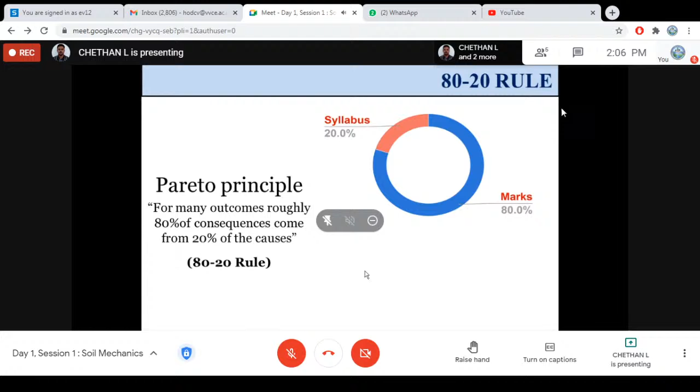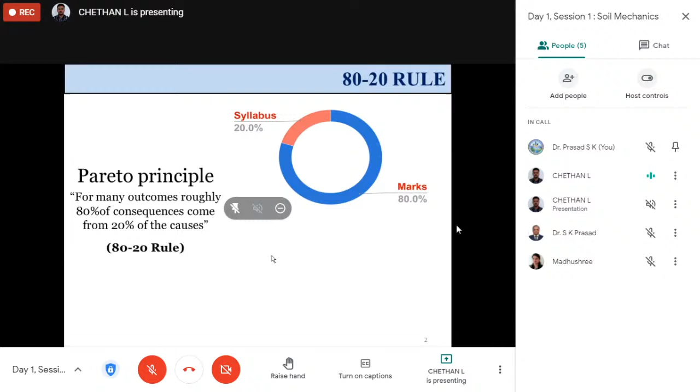So let me start session one. Today's session is soil mechanics, and this is the first session. The basic concept I personally believe in for any winning strategy is the Pareto principle, which says that for many outcomes, roughly 80% of the consequences come from 20% of the causes. Here, 80% of the consequences basically means 80% of the marks you can obtain from any examination can come from 20% of the causes, which is basically 20% of the syllabus.

Here I am relating the consequences with the marks, as well as the causes with the syllabus. So as I mentioned about the syllabus, that 20% of the syllabus will give around 80% of the marks, which is basically the Pareto principle. The same way, if you apply it from another perspective, to cover just 20% of the marks, we have to study about 80% of the syllabus.

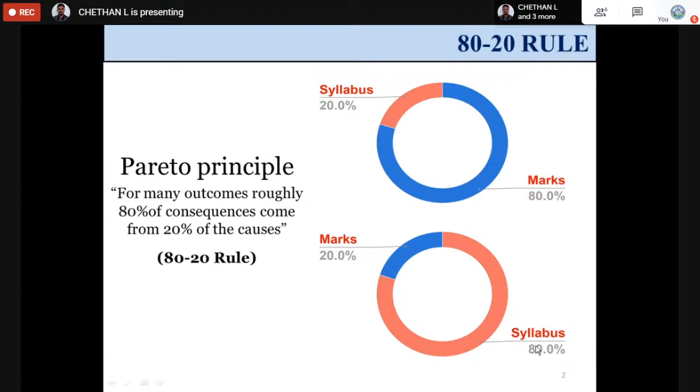Someone can ask me, how can you say this without any proof or data? Here I'm going to show you some data which I have referred from the Made Easy textbook, already available on the internet as a soft copy. You can go through it. It's a wonderful textbook provided by Made Easy and ACE coaching centers.

Here is the data to prove the Pareto principle I told you about. I've taken data from 1991, when the exam started, until 2018, taking two sets of papers for 2018 as well. I took the total marks obtained each year from geotechnical engineering, put them all together, and took an average. So totally I've taken almost 28 years of data, which shows the average marks obtainable from geotechnical engineering every year is around 15.45 marks. That's what I want to show.

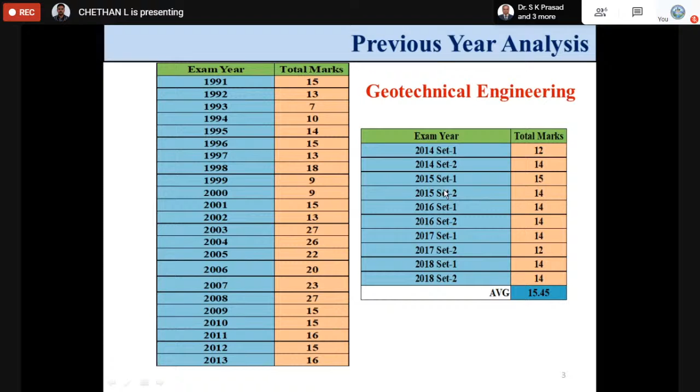Moving on, after doing the previous year analysis of major marks distributed each year, here I'm talking about the total number of questions asked. In the past 27 years, geotechnical engineering always stands first, with 329 questions asked. The next one that tops is environmental engineering, with around 235 questions.

Sir, why are you giving all this analysis? Because I will get back to it. So again, talking about the past 27 years, in 2012 the GATE Board Academy made a small announcement that the 100 marks examination would be conducted including 15 marks of aptitude. So where will the aptitude part come in? That I'll discuss later.

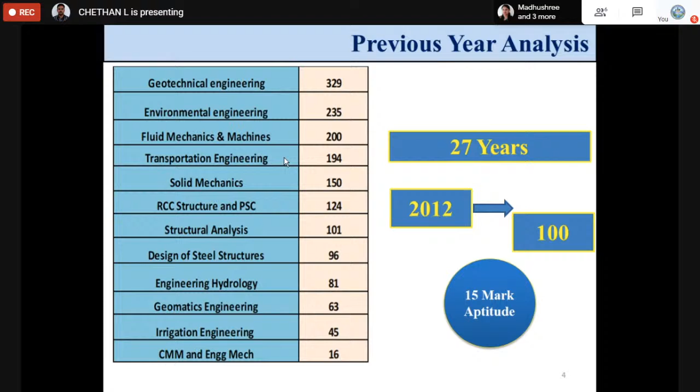I've made a small analysis showing the entire marks distribution already shown for the previous years, as well as for particular subjects in the civil engineering department. But here I've taken the entire data including the aptitude test questions. So the marks distribution for the average analysis goes like this: aptitude is 15 marks, geotechnical engineering is 14 marks, engineering maths is 12.5, environmental engineering is 10 marks, fluid mechanics 9.5, transportation 8.5, solid mechanics 7.5.

Why am I talking about all these things? Because if you look here, if you study only 4 subjects including aptitude along with maths - that's geotechnical, environmental, fluid mechanics, and transportation - you can get almost 69.5 average marks by studying only 6 subjects.

So say, no sir, I want to study more, 70 marks is not enough. If you want to go for more marks, you can study by concentrating on another 4 subjects. Here, what I've done is separated everything subject-wise and put the average marks.

So here again the Pareto principle comes in. For example, if you want to get 70% of the marks, it is enough for you to study only about 30% of the syllabus. That is exactly what I mean. That is why I included the Pareto principle in the beginning, which says 80% of the marks can be obtained from 20% of the causes.

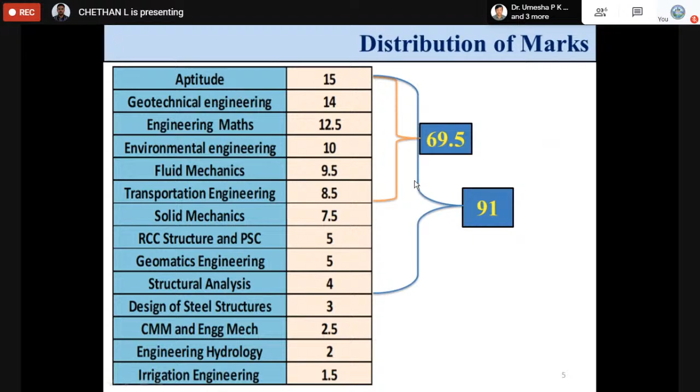That is, here it is a syllabus, right? So further, let me move on. So now I'm going to start the particular soil mechanics analogy here. So welcome you all for the geotechnical engineering. As you all know that, right?

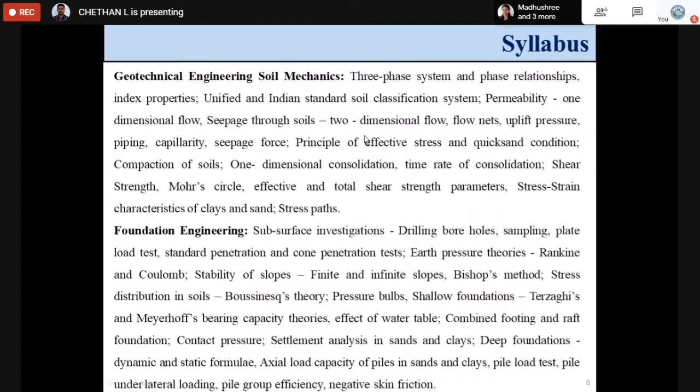So the GATE Geotechnical Engineering syllabus is basically composed of 2 parts. One is called the soil mechanics and another one is called the foundation engineering. In soil mechanics, basically it talks about all the basic elements or basic concepts of geotechnical engineering. But when it comes to foundation engineering, you will be going to apply every concept, every basic we have studied in the soil mechanics. So here is the brief description about the syllabus which appeared in the GATE.

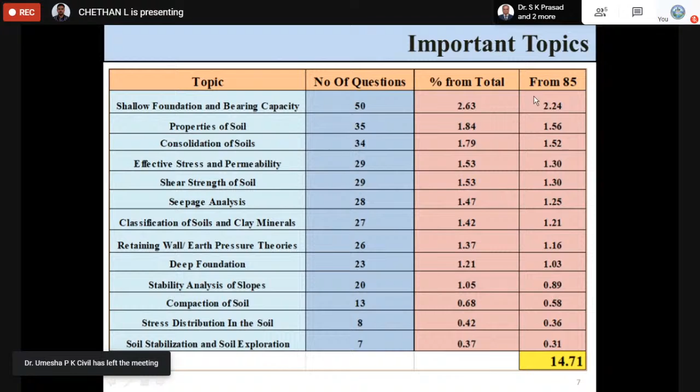The same way I have identified each topic and given the marks list here. As I mentioned earlier, the average marks given to geotechnical engineering is always around 14 to 15% of the marks, that is 14 to 15 marks. Here we come up with 14.71 marks as the distribution from the last 27 years. So this is where the strategy comes.

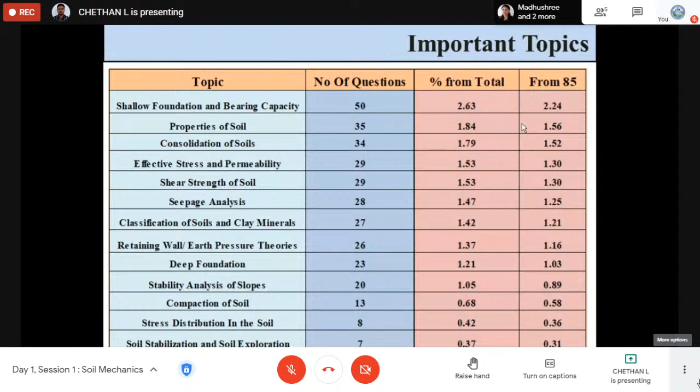So next, as I told you, geotechnical engineering in GATE has been divided into 2 individual topics. One is soil mechanics and another one is foundation engineering, right? So the 12 topics from the previous slide, I again classified into which one is the soil mechanics part, that is the basic part, and which one is the advanced part, that is the foundation part. For that, I have divided these topics into 6 columns: property of soil, classification of soil, clay minerals. These 3 are the theory part, very basic, right? Then we have compaction of soil, effective stress, permeability, shear strength of the soil.

Same way, the foundation engineering subjects: soil exploration, stress distribution, stability analysis, foundation, and retaining wall earth pressure, everything will come under the foundation engineering part. So to cover the entire geotechnical engineering, we have divided the topics into 2 categories: the soil mechanics part and the foundation engineering part. The soil mechanics has been allocated to me, and I will be taking 2 sessions. Today I plan to cover these 3 topics.

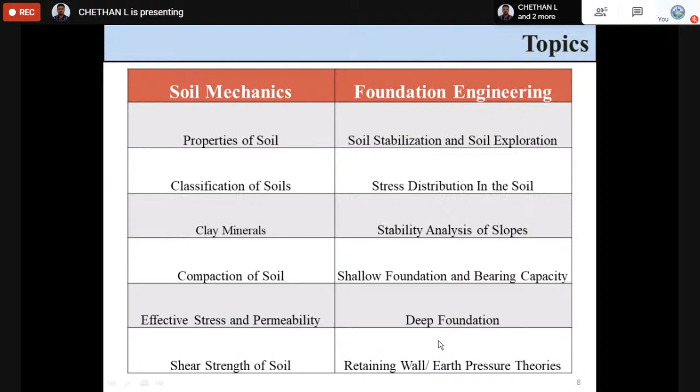The initial first 3 topics will be covered today, and the remaining 3 topics will be covered on December 1st. Okay, so let's move on. And I forgot to mention that foundation engineering will be taken by our HOD, that is Dr. S.K. Prasad sir. He will handle the foundation engineering subject, as he is also one of the very best geotechnical experts. So now, welcome to the family of geotechnical engineering.

Here I will go with the introduction, where we are talking about the basics of the soil. As I mentioned earlier, it might be a little bit theory, but it's only for the first 3 topics. So here, soil is the most common, most useful, and the least expensive construction material. Every structure should be built on it.

One more strategy I am going to tell you people before going to study this. My concept is very simple. I don't want you to study all 100% of the syllabus. I never did. I always used to say that if I study 20%, I will study the 20% exactly. Even I have taken the GATE examination twice, and both times I failed. The first time, I got only around 1.56 marks, and the second time I got around 13.56 by making the analogy, whatever I have done in the second attempt. So don't worry, always do whatever you do with some clarity.

So here I go again, saying that soil is the most common, most useful, and least expensive material. Any structure you build is above the soil or below the soil or uses the soil as a construction material. So it's important for us to know how the soil works. Whatever questions appear from geotechnical engineering, it will be easy when you understand the basics of the soil.

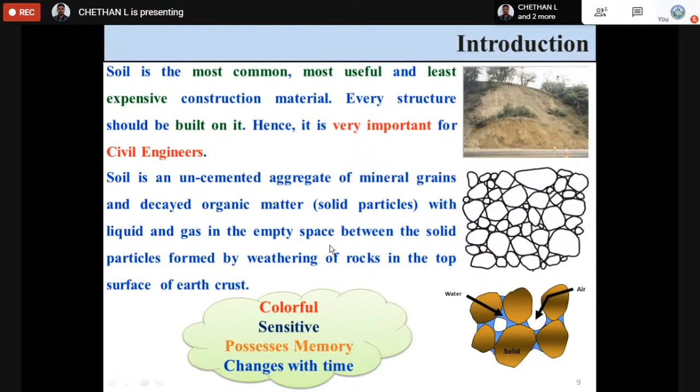So when you come to soil, as I mentioned, it is all about understanding. If you want to understand the soil, just think of a human being. That is it. As we know, soil has been formed by majorly two processes. One is called the endogenic process, and another one is called the exogenic process.

What is endogenic? One more strategy I'm giving you people: if you want to remember anything very easily in geotechnical engineering, always understand the word, like endogenic. Throughout the presentation, I am going to explain by looking at the words. Endo means inside. What is the exact meaning of the word? So here the endogenic forces, that is the inward forces, are the main reason for the formation of the earth. Everybody knows about the formation of the earth. So what is that endogenic force?

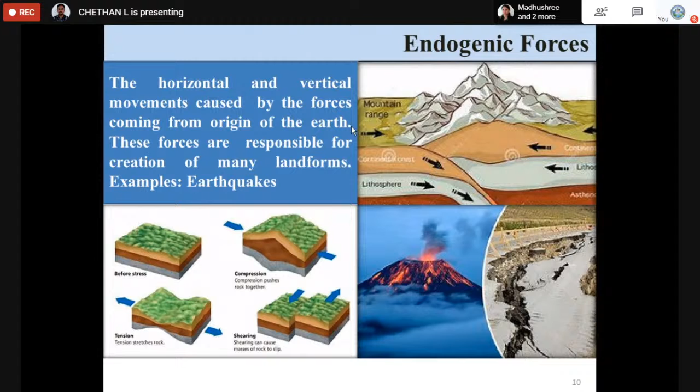It might be an earthquake, it might be a volcano, right? When I'm talking about exogenic process, the exo means outside; an outside force is the reason for the formation of the soil. So how has this process taken place? Basically, we know that the formation of the soil takes place in 4 different processes in a cyclic manner: weathering, mass movements, erosion, deposition.

So what is weathering? We know there is physical weathering, chemical weathering, as well as biological weathering. Sometimes on the formation of the soil they will ask a 1-mark question, so that's why I'm talking a little bit about it. So weathering, as I mentioned, is basically due to physical, chemical, or biological weathering.

Weathering is basically obtaining the minute particles, a complete cyclic process. In physical weathering, the physical parameters are the main reason for the weathering process. If it is a chemical reason, that is the hydration process, the thermal process, which takes place due to chemical ion exchange. Biological weathering might be due to dead and decaying organisms or fossil fuels, decomposition and formation of organics. That is the process in weathering.

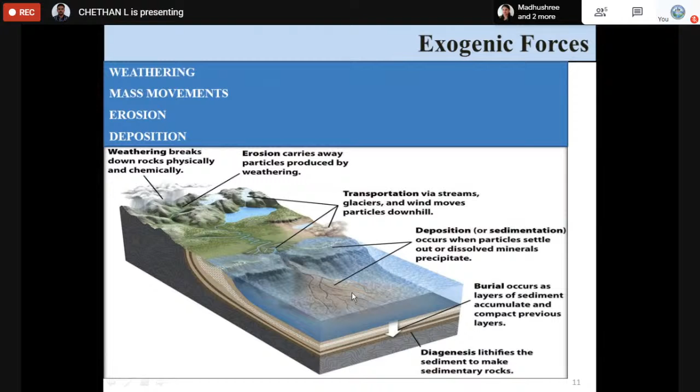Here you can go through it. Weathering breaks down the entire soil mass, then it is going to erode. While eroding, some agents are the main reason. Then somewhere it will deposit, and some other agents will try to carry it. So to explain that, I have put up a small slide. We know that the formation of the soil has taken place here.

Let's assume the soil has formed at its origin state, which is called residual soil. Residual soil means the residue is there at the origin. Another type is called transported soil. Soils are classified into 2 categories: residual soil and transported soil. Residual means it stays exactly where the parent material is available. Transported soil is the one which has been transferred from the origin, so that's why it's called transported soil.

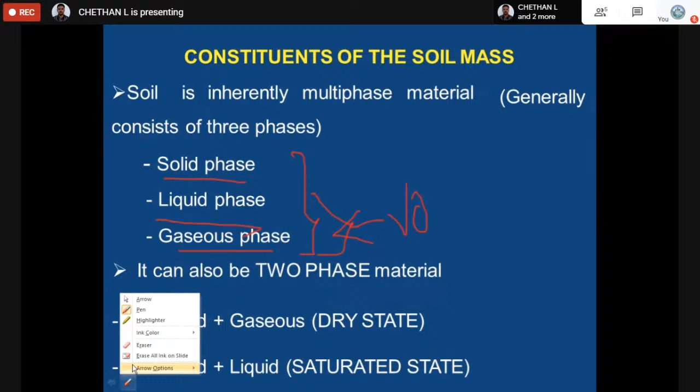So basically, as I mentioned, there are 3 different phases of the soil: solid phase, liquid phase, gaseous phase. The solid phase is basically the minerals or the solids, called soil solids. The remaining 2, liquid and gaseous phase, are called the volume of the voids. Voids means an empty space available in the earth material. Either you can expect the soil in all 3 phases, or in 2 phases based on its condition. So here I have put up both the microscopic view as well as the naked eye view.

Here you see the soil mass. Whenever you see the soil mass, it should appear like this. Whatever brown color is there indicates the solid part, and some of the remaining empty space has been filled with water, and some of the spaces have been filled with air. So let me move on. Whenever I say soil, you have to understand that the soil is composed of 3 phases. One is the solid, and another is the empty space, which might be filled with air, or water, or both.

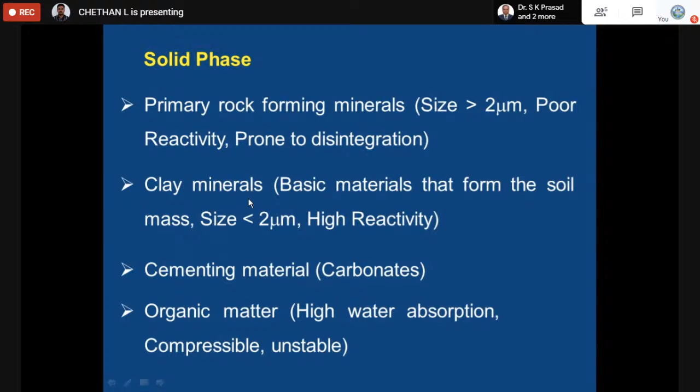Now I am talking about a solid phase. In a solid phase, as I told you, it will be basically minerals. Either it might be quartz, feldspar, or anything in case of a gravel and a sand. But when it comes to clay, the clay minerals will be present in it. So the solid phase is over. Now I will move on to liquid phase.

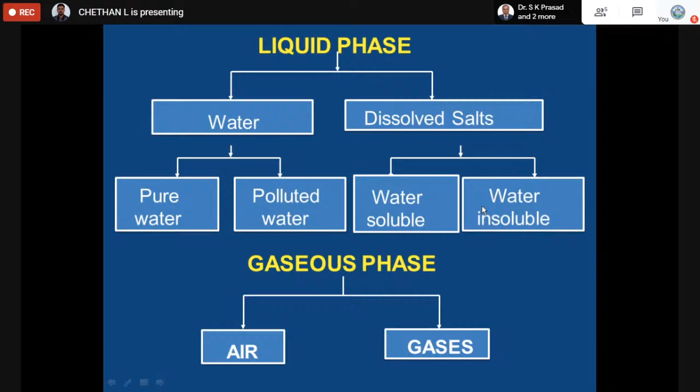It is basically composed of water, or sometimes the soil will also contain dissolved salts in organic soils. Remember it. Dissolved salts will be available in organic soil. Water, either it might be pure water or polluted water. The same way, the salts might be soluble salts or insoluble salts. But when it comes to gaseous phase, it's basically atmospheric air.

So here I have given a small description of how it will be available in two phases and three phases. Here you see it is two phase, that is dry soil. When it is completely dry, the entire void space will be filled with air. When it is completely wet, it is filled with water.

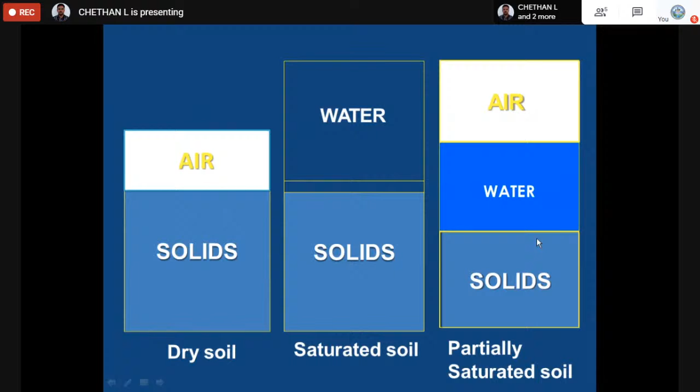When both are present, it will be filled with solids, water as well as air, right? So now, the next important parameter we have to understand in properties of a soil is the phase diagram. What is a phase diagram? As the term itself indicates, it is a system where you are representing the different phases of the soil. We know that the soil might be three phase or two phase: solid, liquid, gas, right? Why am I talking about a phase diagram? Because to understand the properties of the soil, we should know the phase diagram.

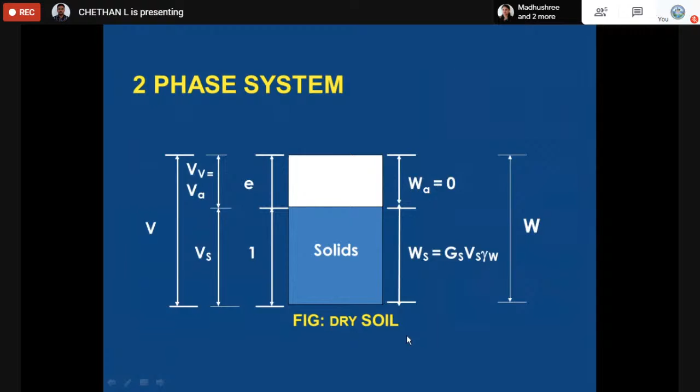In representing the phase diagram, the volume parameters will always be represented on the left side, and the weight relationship will be represented on the right side. For example, here it indicates the weight of air, which is equal to 0. Weight of the solids, volume of voids, volume of air, volume of solids. It's in dry state. If it is a completely saturated state, it will be filled with water, right?

So the same way, while writing the phase diagram, the volume representation will be on the left side, the weight representation will be on the right side. In volume, the first one is air, volume of water, volume of solids, the total volume; then weight of air, weight of water, and weight of solids. The total volume is a combination of both the volume of solids and volume of voids. Here also, weight of solids plus weight of water. There is no weight of air, right?

So next I'm talking about how to remember these properties. There are so many times even I felt stuck. So how to remember this particular thing? Whenever you want to understand about the soil, just think about humans. Here, void ratio is a ratio involving the voids. What is voids? The voids is basically a volume of voids. In the entire soil mass, Vv indicates the volume of voids, that is the empty space. So the ratio of volume of voids with respect to its volume of solids is called the void ratio.

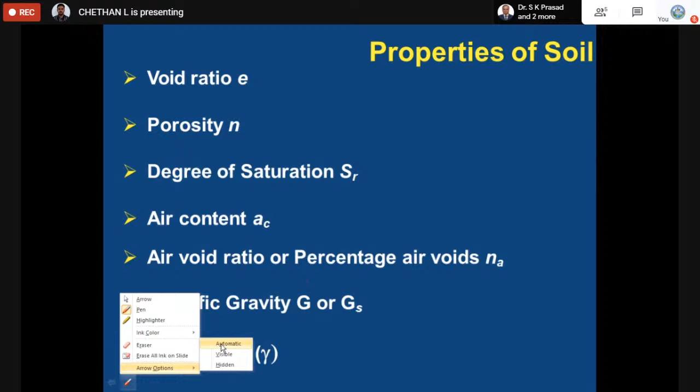This is the way we can remember it. So moving on - index properties. What exactly is meant by index properties? Index properties are properties basically used to identify the behavior of a soil. We understood that soil also acts like and behaves like a human, so to identify it we require some properties to understand it. Those properties are called index properties.

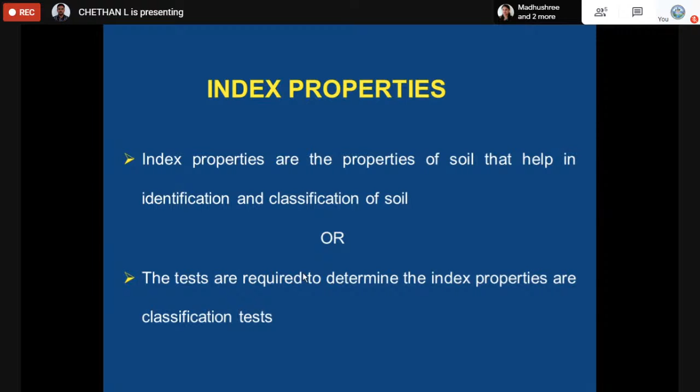What are the index properties and how to determine them? We'll go into detail. But from a GATE exam point of view, one question will always come from two particular points: one is particle size distribution, and another is consistency limits. I'm not going to discuss water content and specific gravity again since we already covered what water content is.

Water content is basically moisture, remembering what is the amount of water which is available in a particular solid mass. That's called water content.

Now, as I told, in index properties, always you can expect the question from particle size distribution or through the consistency limits. So let's discuss one by one.

To understand the particle size distribution, it is a very important parameter when we are talking about coarse grained soil. When I'm talking about fine grained soil, the consistency limits play an important role.

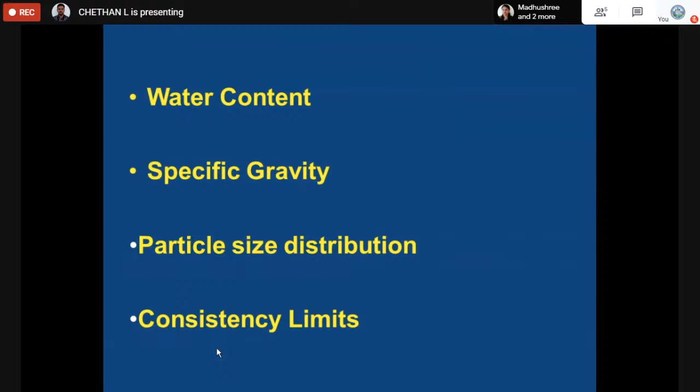If it is particle size distribution, for gravel, sand, everything, the size of the particles will play an important role. But when it comes to fine grained material, consistency, that is plasticity, will play an important role.

To understand the particle size grain distribution, it has been done basically by considering the individual size of the particle as well as the physical appearance, how this soil has been formed, what is the texture, what is the system or structure of the soil.

When talking about visible identification or texture of a soil, the soil can be classified based on its particle size, as well as the soil can be classified according to its structure.

Whenever they ask the question based on structure, we already know that the soil structure has 4 different types: single grained, honeycomb, flocculated, and dispersed. We know that the predominant particle structure in coarse grained soils is single grained and honeycomb.

But when it comes to clay minerals, and to the formation of clay, the flocculated and dispersed structures are the important key elements or key structures which are basically available in clay minerals.

So sometimes they will ask about flocculated structure and dispersed structure, and what is the orientation of the structure of the clay mineral. We know that the flocculated structure has been formed through edge-to-face orientation. But when it comes to dispersed structure, it has been formed with face-to-face orientation.

Remember, face-to-face is for dispersed structure, that is FDF. But when it comes to the flocculated structure, it has face-to-edge structure, that is FEF. Okay, remember that.

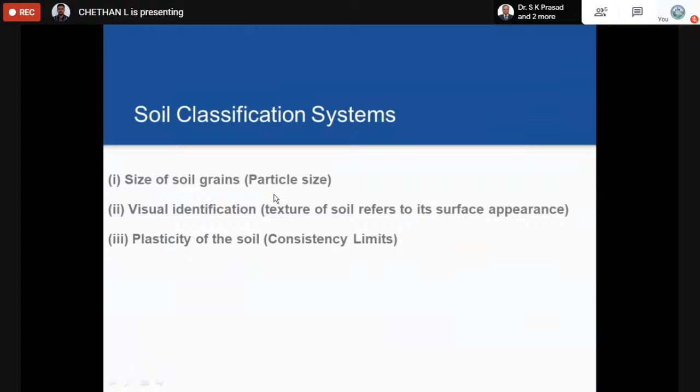Now, as I'm talking about the texture of the soil, as I mentioned about the different structures, next I will be talking about how we can classify the soil based on particle size and what all questions can be asked.

So basically, whenever we are talking about particle size, it basically influences gravel, sand, as well as cobble, boulders - that is coarse grained soil according to our IS classification system. So here I will explain everything in the IS distribution curve.

Basically, the particle size distribution has been done by using 2 methods: one is called sieve analysis and another one is called sedimentation analysis. Whenever you want to analyze the soil, the complete analysis can be done by using sieve analysis plus sedimentation analysis.

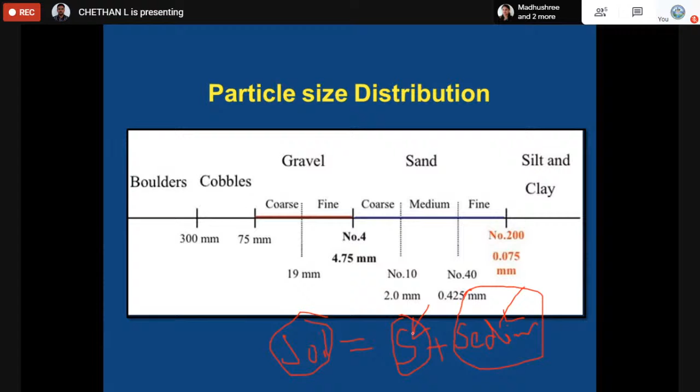The sieve analysis is basically taken for coarse grained soil. So if the soil has to be completely analyzed, it has to go through 2 processes: the sieve analysis and the sedimentation analysis.

For the sieve analysis, we know how the sieve analysis and sedimentation analysis has been carried out. I'm not going to explain the theory, but here you understand that sometimes in particle size distribution curve questions, they are going to ask the name of the particular soil which has been formed through the particle size distribution curve.

Simple, right? The same way, we know that one more question they basically expect here is about the particle size diameter. So that is the effect.

There are basically three different effective particle size diameters: D10, D30, and D60. D indicates the diameter. D10 indicates that 10% of the soil is finer, and similarly D30 indicates that 30% is finer, in the entire soil mass.

The same way, we are going to take these effective diameters to identify the soil. How can we identify the soil? Either by taking the CU and CC value. CU and CC value has been defined by using this effective size diameter. That I will explain later.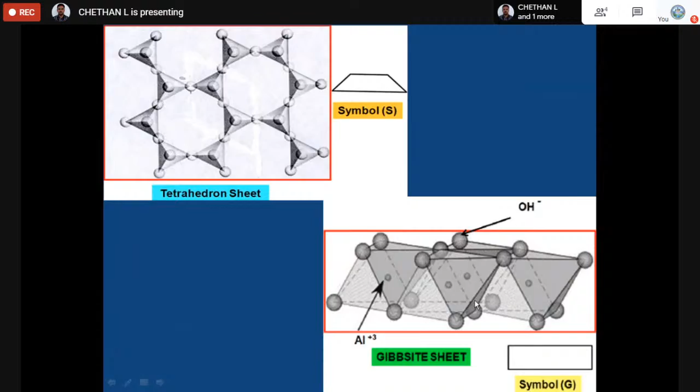So this one complete unit of 4 ions you can see here from the top view. All have been joined together. They are interlinked and they are going to form a sheet. That particular sheet is called a tetrahedral sheet or silica sheet, which is represented by the symbol like this. The same way it is there for the octahedral unit.

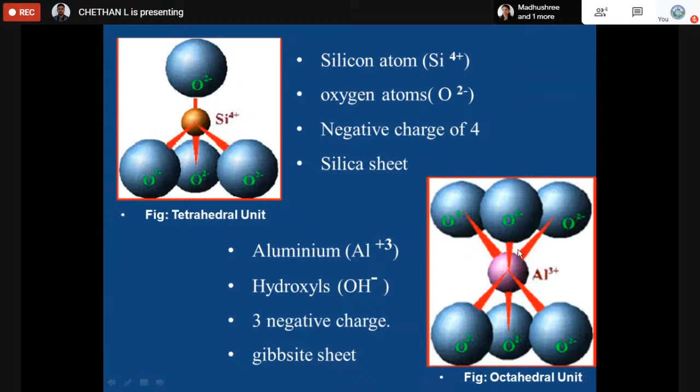The basic structural elements for clay are two: one is the tetrahedral unit and the other the octahedral unit. Always remember, the silica sheet is formed by the tetrahedral unit and the gibbsite sheet is formed by the octahedral unit. In the tetrahedral unit there will be a silicon atom, but in the octahedral unit there will be an aluminum atom. So this is how it will be formed.

What are the basic important clay minerals? These clay minerals have been formed through these basic structural units. The four clay minerals are kaolinite, halloysite, montmorillonite, and illite. As I mentioned, there will be one question from the clay minerals part. We can expect combinations there, so we should easily remember these four different types of clay minerals.

Kaolinite is basically the kaolinite group. It is always formed by the alumina sheet and silica sheet one above the other. We saw the silica sheet is formed like this, and the gibbsite sheet, the alumina sheet, like this. Remember, kaolinite has a 7 angstrom thickness and it is the strongest clay mineral. It has a specific surface area of 15 square meters per gram. China clay is an indication of the kaolinite group.

Sometimes it will be asked, what is China clay, which group does it indicate? It has been asked, I think, twice. The mineral which represents China clay is kaolinite. And remember, the kaolinite group of minerals is held together by hydrogen bonds.

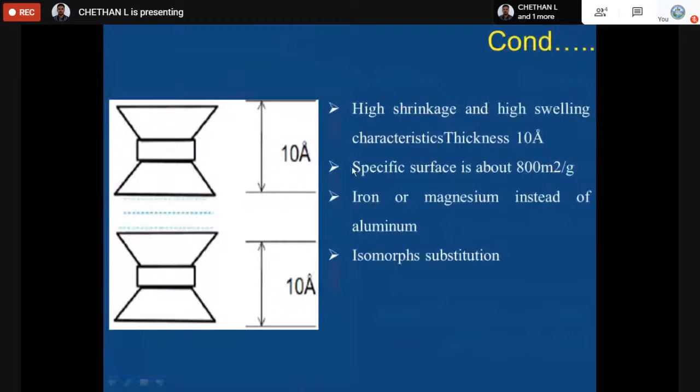Remember, montmorillonite is in the montmorillonite group and illite is in the illite group, but kaolinite as well as halloysite come under the kaolinite group. Here the specific surface area is 800 square meters per gram. So the maximum specific surface area is for montmorillonite, the maximum thickness is for montmorillonite, and maximum swelling and shrinkage can be expected only from montmorillonite. Illite also has a larger negative charge. That's why it is a little bit stable.

So now here come the important parts. One thing I talked about is the property of the soil, second the clay structure, and third the clay minerals. Before I summarize these three topics: one is the property of soil, second is the clay minerals, and the structure or particle size distribution of the soil.

In basic properties of soil, always remember the formation of soil takes place through a cyclic process of weathering. They can ask about different kinds of weathering, but in formation of soil remember two key points: how the process takes place, and what the agents are, like the transporting agents for the soils. That agent matches the particular formation of the soil. Always search for the hint in the particular word and you can easily get it.

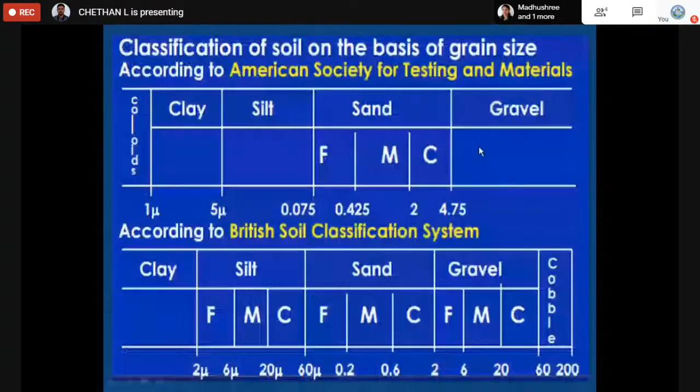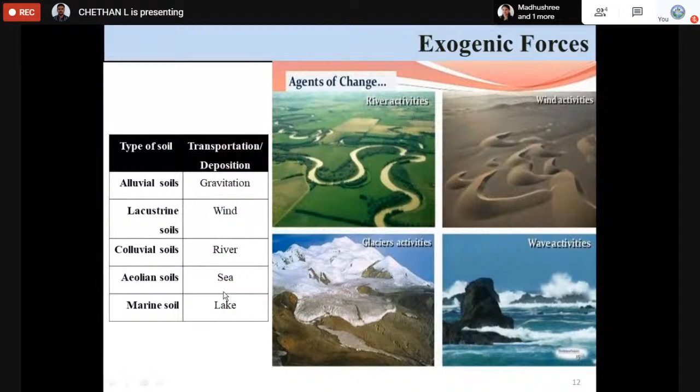The second one I talked about is the basic properties of soil, where we have to remember void ratio, porosity, everything. Let me summarize as quickly as I can. We came up with the formation of soil, where I told you to remember this slide where the agent determines the particular type of soil. Next, I told you regarding the constituents of the soil.

In particle size distribution, you have to remember effective size diameter, Cu and Cc, how to classify soil based on Cu and Cc, and how to classify soil based on its particle size distribution. Importantly, in the Indian soil classification system the finest particle is clay, and the largest particle is boulder.

And as I told you people, we should not forget the 75 micron as well as 4.75 mm, because any soil which passes the 75 micron we basically call a fine grained soil, and 4.75 mm basically helps us to classify the coarse grained soil into sand and gravel, right?

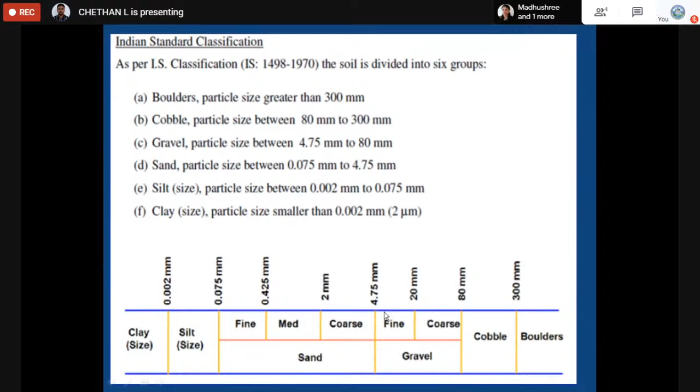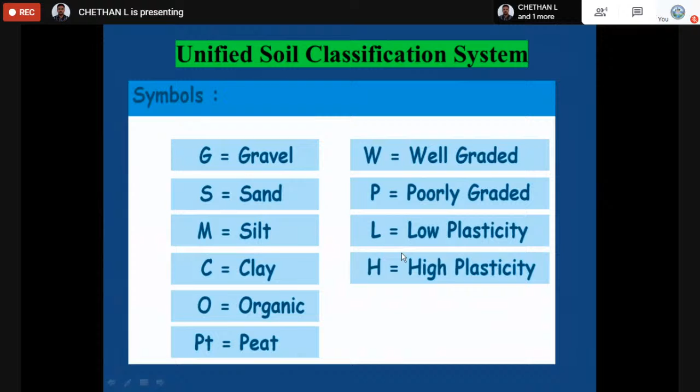Then we talked about the unified soil classification system, where every terminology and every symbol indicates something. G indicates gravel, S indicates sand, silt is M, clay is C, organic is O, peat is PT, and based on gradation it will be classified into well graded or poorly graded. Based on consistency or plasticity, we can go for H and L. In the unified soil classification system, we have to remember coarse grained classification takes place through grain size, fine grained through consistency.

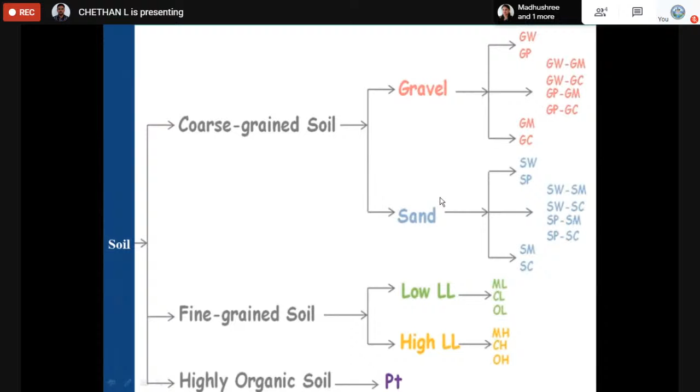Organic soils have a very low specific gravity, because specific gravity is basically about any substance with respect to a standard substance. What will happen if any substance has a specific gravity less than 1? It basically floats, right? That is what happens whenever the specific gravity is less than 1. Next, we talked about the plasticity chart.

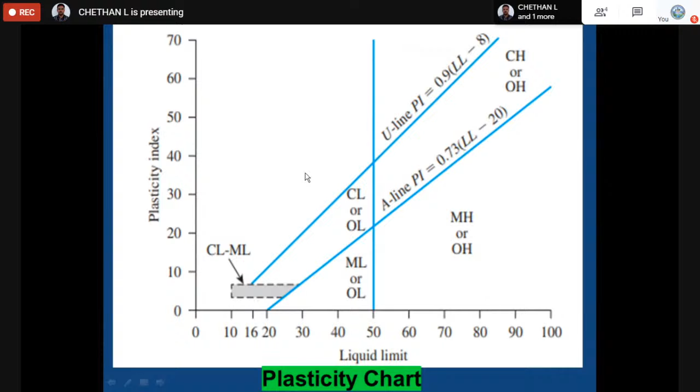Here we have to remember the plasticity chart can be represented using two different systems. One is the unified soil classification system and another is the Indian soil classification system. The first was derived by the unified soil classification system, which has a U line, drawn using 0.9(LL - 8), where LL indicates the liquid limit. In unified soil classification, it is divided exactly at the middle into high and low. But the Indian soil classification is divided again at 35%. So next we talked about the clay minerals.

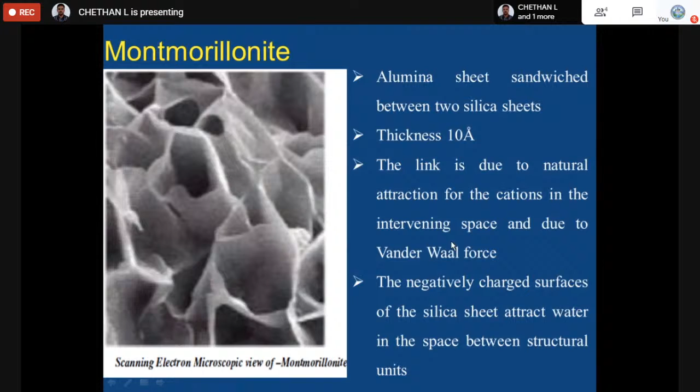In clay minerals, we have to remember that kaolinite is the strongest, China clay is also called kaolinite, and 7 angstrom is its thickness, and halloysite is basically a tubular clay mineral. Montmorillonite exhibits maximum shrinkage and swelling with a maximum surface area of 800 square meters per gram. Along with that, it has a thickness of 10 angstrom. And in the illite group, the non-exchangeable potassium ion plays an important role.

Okay, so now let me go to the last 5 minutes of the session. In the initial analysis, I showed you up to 2018. Now I have taken 3 to 4 questions from GATE. The first question, GATE 2018 first session: the notation SC as per the Indian standard soil classification system refers to what? C indicates clay. S indicates sand. So wherever you search here, clayey sand. So that is one question from GATE 2018.

Second one: the clay mineral whose structural units are held together by a potassium bond. We know that potassium ions are available in the illite group. That's why I told you to remember. So for potassium bond, we go for illite. The answer is illite.

The third one: a core cutter of 130 mm height has inner and outer diameters of 100 mm and 106 mm respectively. Find the area ratio of the core cutter. I put this question here because it is related to the density of the soil, the in situ density. We can also expect the same question in subsoil exploration, where we talk about samplers, so I can take this question there.

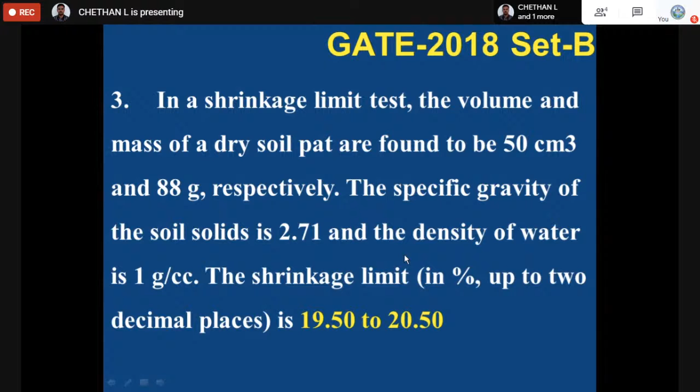Okay. So I have put a small question, one question for myself as well as for you people. Sometimes they will make use of an application problem. So here is one question for you people. How many cubic meters of earth fill can be constructed at a void ratio of 0.67 from 19,000 meter cube of borrow material that has a void ratio of 1.1? I will give a hint, you can solve and go through it.

Okay. So what is the question? The question is very simple. It has been taken from the properties of the soil, but it is a little bit indirect. They're asking how many cubic meters of earth fill can be constructed. How much earth fill you can construct at a void ratio of 0.67 from 19,000 meter cube of borrow material that has a void ratio of 1.1.

That is, assume you have to construct a road over there. The borrow material has a void ratio of 1.1. Okay, so you have to construct a road over there. The void ratio should be 0.67, but you are taking the material from somewhere.

Okay, so fine. So here, how many cubic meters of earth fill can be constructed at a void ratio of 0.67 from the 19,000 meter cube of borrow material, which is at a void ratio of 1.1? The earth fill we have to construct at 0.67, but the material we are bringing from the site is 19,000 meter cube in volume, where the void ratio is 1.1. So now you have to calculate the volume of the solids or the volume of voids which is available in the soil.

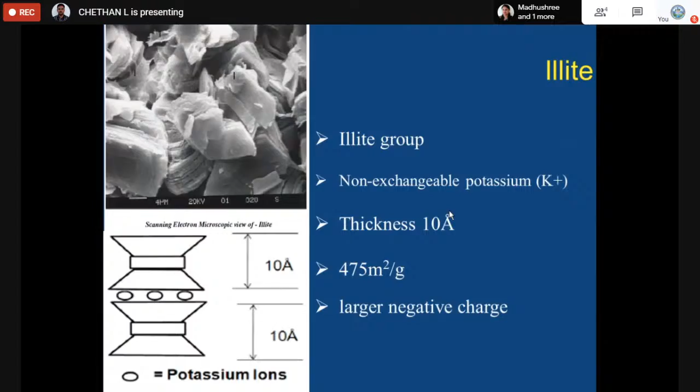Even though silt or clay has very minute particles, we might think it will have more permeability. No. Here I will show you. Let me take this one. Here you see this skeleton, I will take it as a gravel. In the gravel, you can see the voids are more. When the voids are more, what will happen? It will allow a large amount of water to pass through it.

But take this solid part as a silt. Here, when the water is allowed, it will take a lot of time to penetrate into it because the voids are not there. There is no space in between the solids as compared to the gravel. So which soil has low permeability? Low permeability can be expected from fine grained soil.

If you ask me particularly which is the fine grained soil, I will say it's clay minerals. Any soil which has the dispersed structure will possess low permeability in fine grained soil.

Good, can you explain particle size of CU and CC again? Let me take you through this. What is CU and CC? For fine particle size distribution, CU is uniformity coefficient and CC means coefficient of curvature. These two classifications have been done by considering the effective particle size diameter. What is effective particle size diameter? There are basically three different types of effective size diameters: D10, D30, and D60.

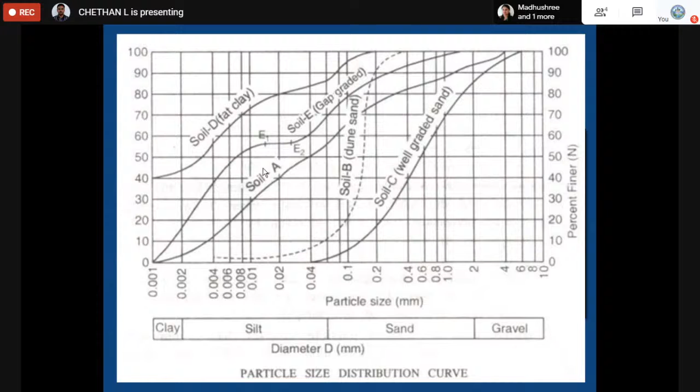Based on using this particular effective size diameter, we can classify the soil by defining CU and CC. CU is basically defined as CU equal to D60 by D10. So as I mentioned, D10, D30, D60, CU equals D60 by D10, and that ratio is CU. What is CC? It is equal to D30 whole square divided by D10 into D60, so which can be classified.

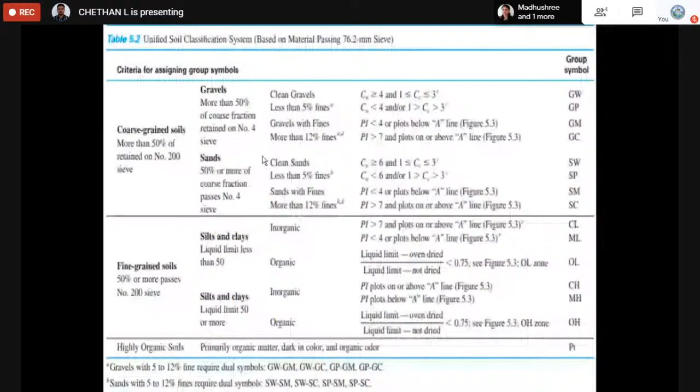Here you see at the bottom we have represented different classifications in a plasticity chart. I hope that has cleared up that particular answer.

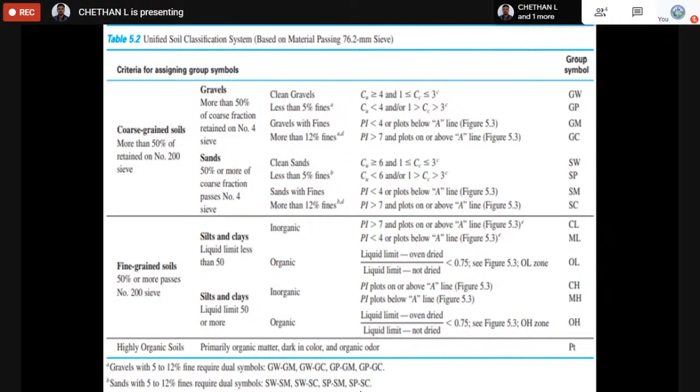Is it sandy clay or clay sand? Is it a clay? For the question given here, I think you're asking: is it a sandy clay or a clayey sand? That is the question. Why are they asking if it is sandy clay? Because the S has been represented first and clay has been represented second, right?

But in the classification system, the second letter indicates when two different types of the same soil are available. If we are not classifying based on gradation, we are considering two different soils, one is clay, another is sand. So in that system, we represent the second term first, that is C which indicates clay, and S indicates sand.

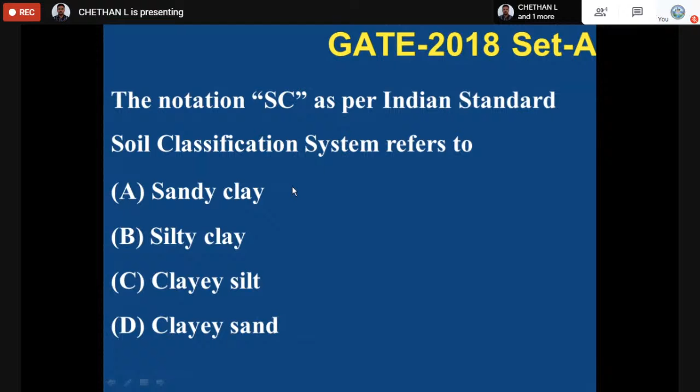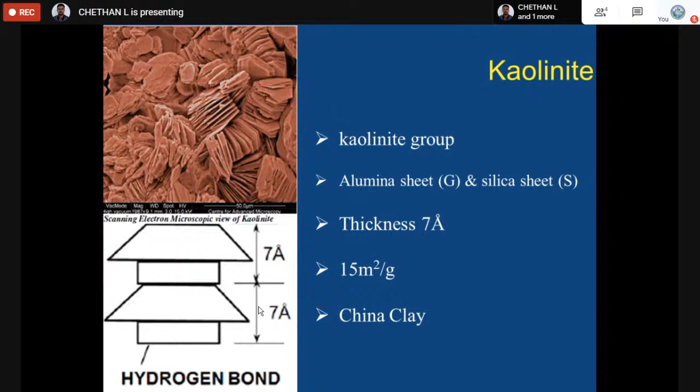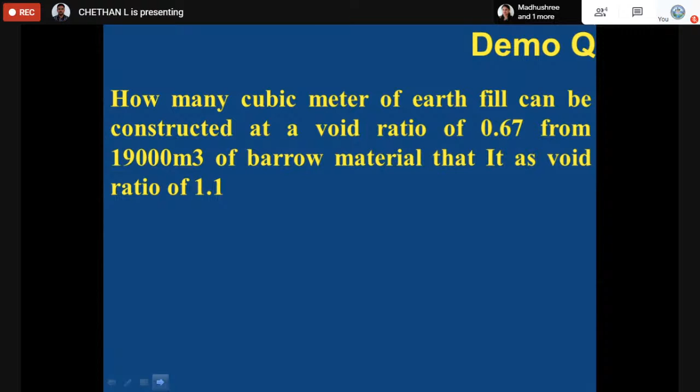The last question, here. For the last question, Abhishek as well as Hitaishi have put up answers, and they're asking me whether the answer is correct or not. They're saying the answer is 15,109.5 meter cube. For that I have given an explanation here, see. So this is the solution for the question.

I was expecting the question, so it was good. I thought of taking the solution in the next session, so it's fine, no problem. So here, what is the question? We know that we have to construct this particular road.

By using a void ratio of 0.67. So to construct this road, we have brought soil from the field, which is of amount 19,000 meter cube. The volume is 19,000 meter cube with a void ratio of 1.1. I want to construct a road which has a void ratio of 0.67.

So what I have done: the known values are volume is known, the void ratio is known. I have defined the void ratio. Again, I'm saying we are defining the ratio of voids, volume of voids with respect to volume of solids. What is volume of voids?

Sir, there is no volume of voids given here. There is only volume of the solids we can expect, or we know the total volume. So how do we take it? We know that the total volume will be equal to volume of voids plus volume of solids.

The total volume equals volume of voids plus volume of solids. So what I have done, I have related both equations, so I can get two variables. Here there are three variables. I will get only two variables out of which I can relate this void ratio.

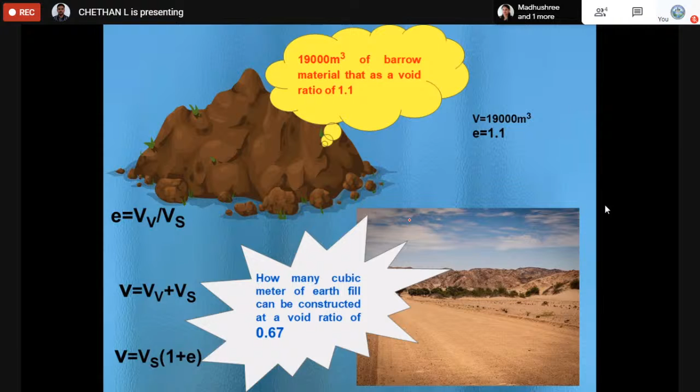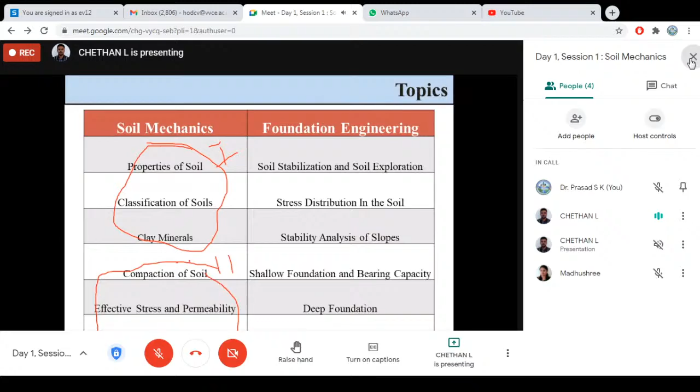The second session will be on December 1st. I will be taking you through the problems, because this theory part we have studied is the basics required for this particular subject. So these are the 3 topics we have covered today. The next session will be talking about compaction, effective stress and permeability.

One more question is about what percentage of marks we can expect in soil mechanics and foundation engineering. That is a question I asked myself. When I did the analysis, we can expect around 6 marks in soil mechanics, and more than 8 to 9 marks from foundation engineering.